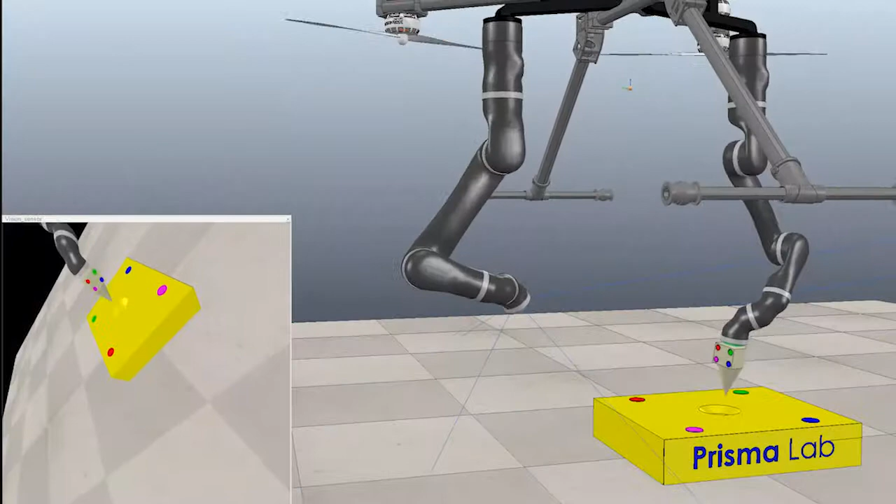The block diagram of the proposed control scheme has a cascade structure, with an inner loop for motion control and an external loop implementing the proposed visual impedance control laws. Three novel visual impedance control laws have been designed in a common control framework: two first-order impedance control laws, based on the transpose and the inverse of the system Jacobian matrix, are proposed together with a complete second-order visual impedance control law.

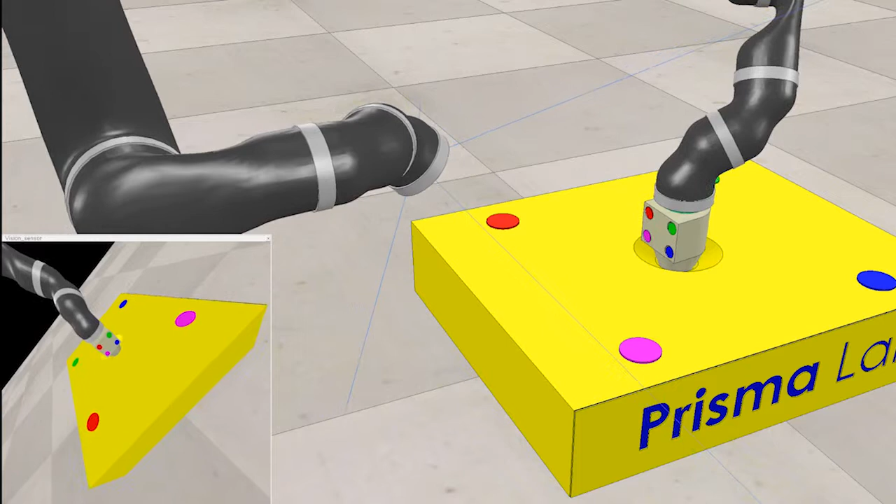Visual information is employed to coordinate the camera motion, fixed in one hand of the robot, with the assigned task executed with the second arm carrying an object. In an innovative way, for each control law a suitable visual error is defined directly in the image plane, generating an elastic wrench component to nullify the pose error with a compliant interaction behavior.

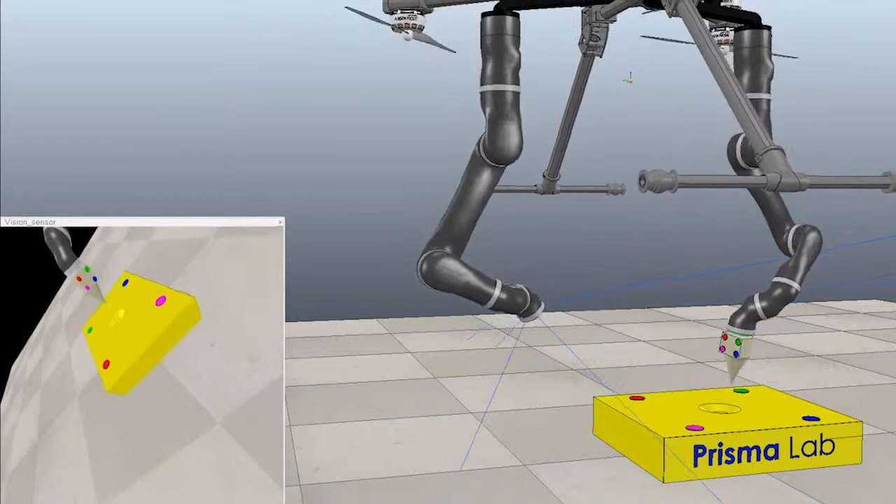The proposed control laws have been tested in simulation using VREP and MATLAB. An X-8 drone is endowed with two Kinova Mico 6-DOF robot arms. A camera is attached to the left arm, while a peg, a conical pyramid, is attached through a wrist force sensor to the right arm, and a hole is fixed on the ground.

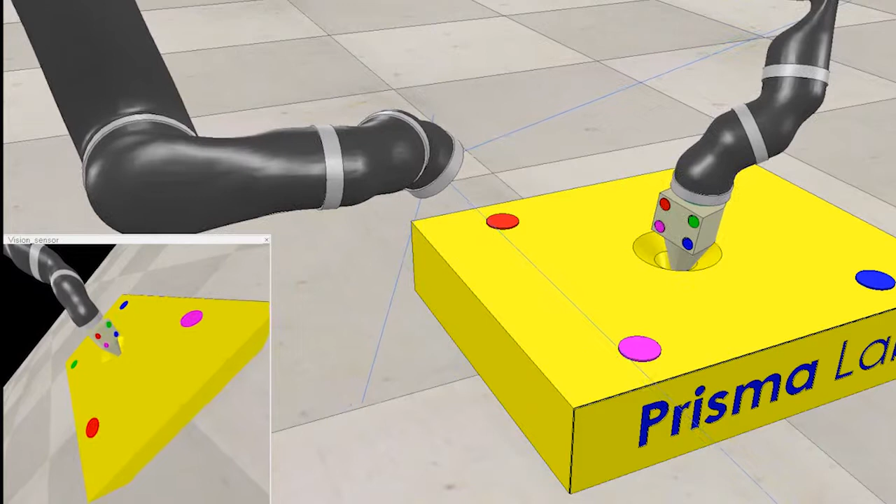The goal consists in inserting the peg into a fixed hole, starting from an assigned initial configuration, using only visual and force measurements. Four point image features fixed with the hole are considered in a square configuration, while four virtual image features are generated using the robot arm's direct kinematics.

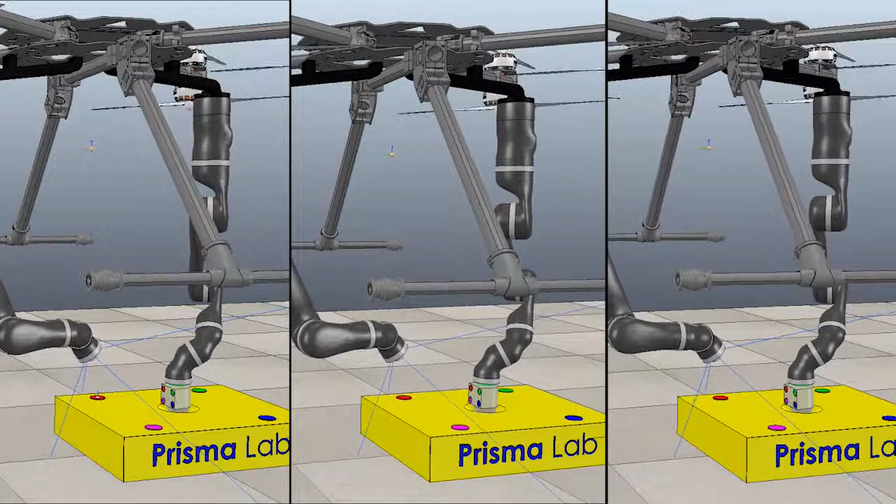Both visual and force sensors have been characterized with additive white Gaussian noise. The proposed control laws have been tested comparatively by tuning control gains to achieve a similar settling time and residual force at steady state. The achieved behaviors are hence similar, but the second-order visual impedance control law allows better control of the Cartesian motion, avoiding impact with the hole border.